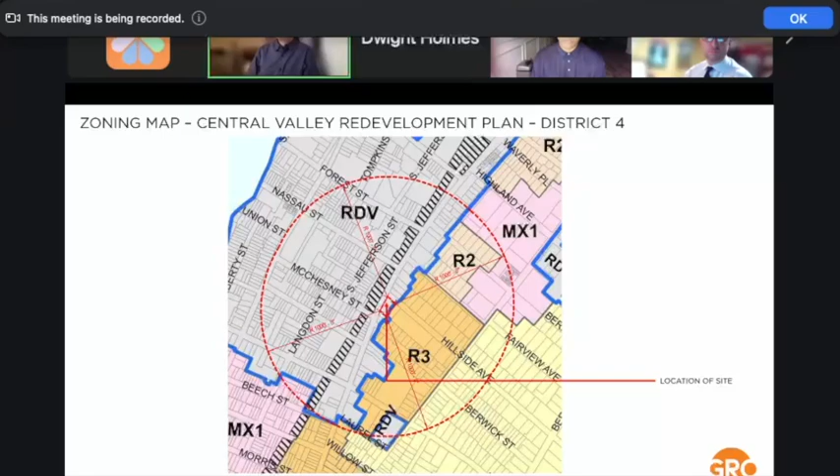To continue, the project sits in the Central Valley Redevelopment Plan District 4, with the 1,000-foot radius highlighted in red. You see it's adjacent to the R3 district, which is a somewhat more dense housing district within the City of Orange. We are also interestingly along a transit corridor, the New Jersey Transit Rail, which figures prominently into our thinking about building design and the transit-oriented suitability of the project.

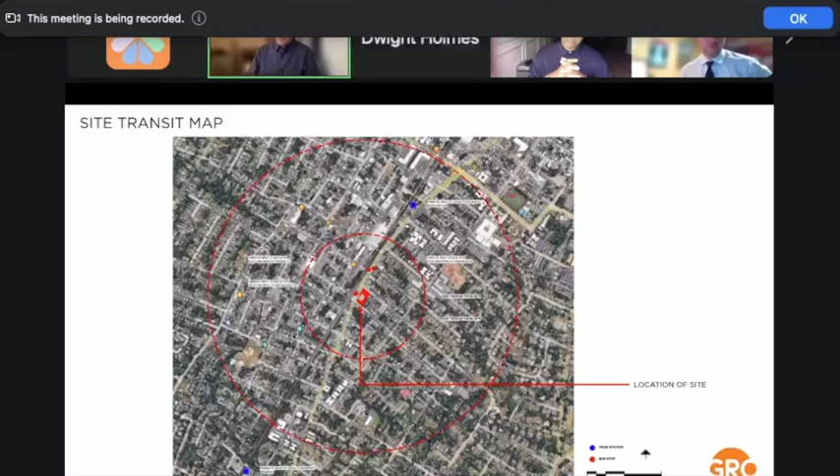It's right in the middle of 2 train stops, between a 10 and 15 minute walk - 15 minutes to the longer one to the south, and 10 minutes to the stop north of us. In addition, we have 3 bus stops, including one right across the street from us on Scotland Road. You see here the 1,000-foot and 2,500-foot radii, signaling walkability, and certainly those bus stops are within 1 and 2 minutes of walking.

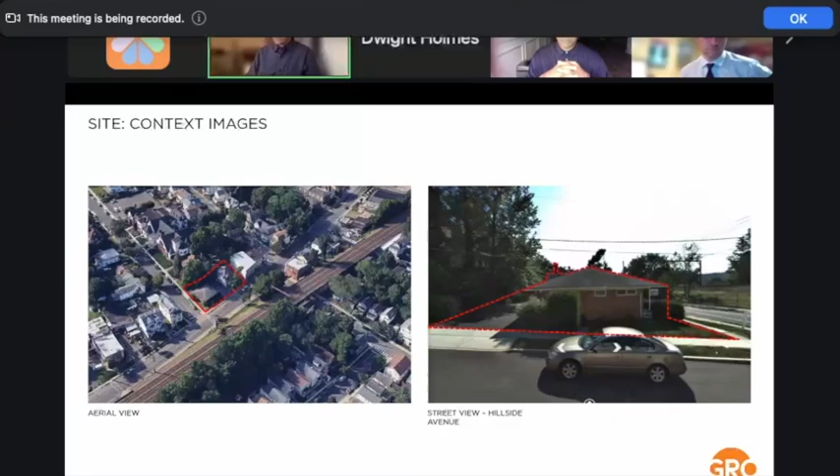The Historic Board agreed last night that the 2 houses existing on the site are non-contributing houses. One is a 1960s-style ranch used as a dental office, and the other is a slightly older house in some disrepair. You can see that house on the left image here, and then on the right image.

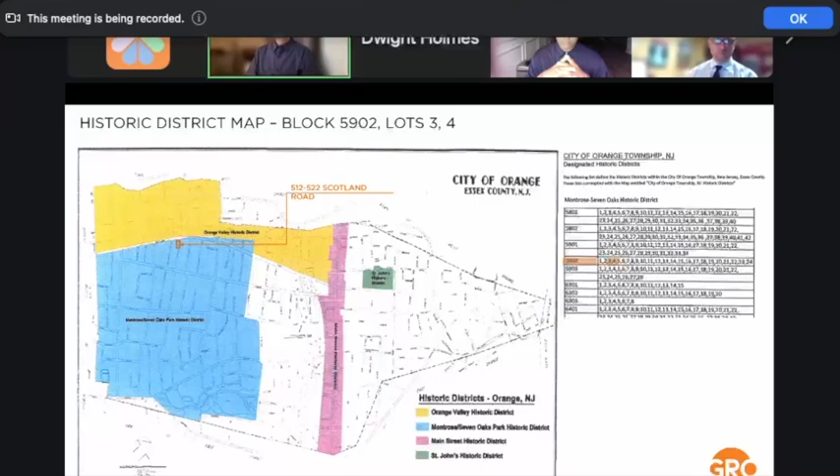We are in the Historic District - specifically the Montrose Seven Oaks Historic District. We're bordering the Orange Valley Historic District, which is on the other side of the tracks, and you can see where we sit prominently on that edge of blue.

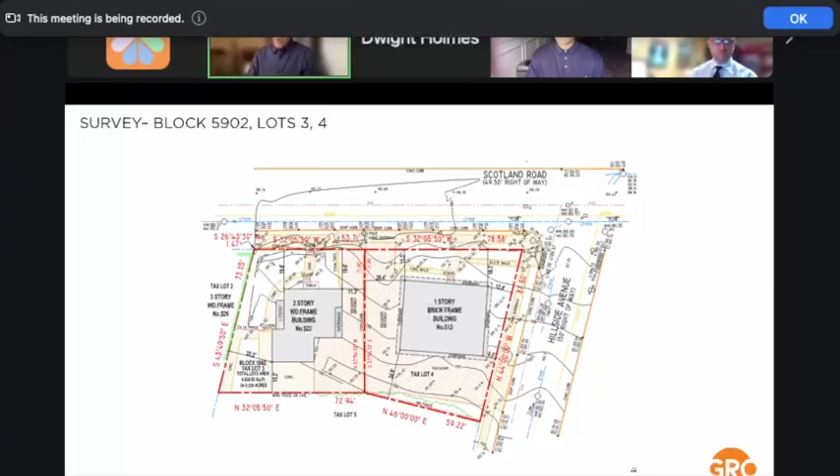We are cognizant of that in proposing an ADA accessible ramp for pedestrian entrance in the front of the building on Scotland Road, as well as a vehicular driveway and drive aisle that is coordinated with the slope of the land, which you'll see in a second.

Now, to read some information into the record, the total lot area, this is lots 3 and 4, is 9,936.02 square feet, about 0.228 acres. The gross building area proposed before you is about 39,734 square feet, slightly under 40,000 square feet.

It's a residential occupancy. We list an S occupancy for the parking garage on the ground floor. It's in the Central Valley RDP District 4. Our proposed height, which complies with the zoning, is 5 stories and 58 feet, and we're proposing 30 units.

Of the 30 units, we have 1 studio at 564 square feet, 14 one-bedrooms at 751 to 799 square feet, and 15 two-bedrooms between 1,001 and 1,049 square feet. So in terms of housing diversity, this is right down the middle, split between 1 and 2 bedrooms, with the exception of 1 studio.

And you'll see why that unit is a studio. You'll see they are healthy sized units and consistent with other projects that we've brought before the board, and still other projects that this board has approved.

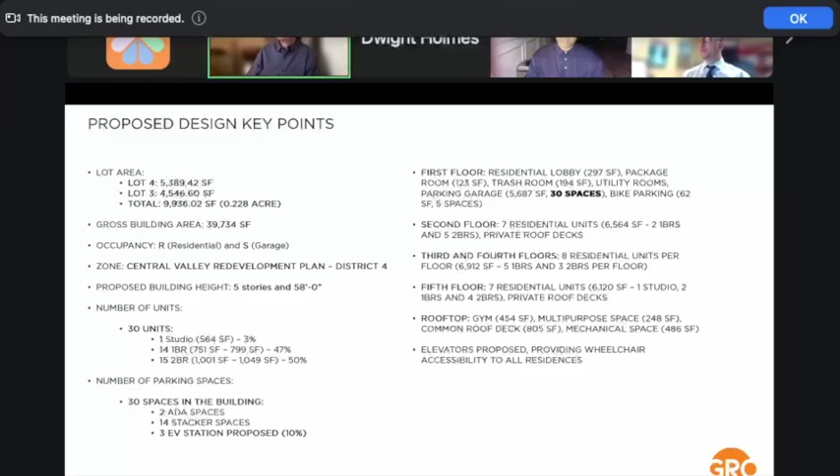You can see that we have primarily residential floors. The 2nd through 5th floor are residential. The ground floor is primarily parking, but does contain a lobby, a trash room, some utility rooms. There is a rooftop with amenities, a 454 square foot gym, a 248 square foot multi-purpose space, and just over 800 square feet of common roof deck, which we think is really great.

The buildings that are on the site are slated to be demolished. Again, that was discussed with the historic board last night. There were no issues with that. This is our site plan.

So the building is on Scotland Road on a corner with Hillside. You see Hillside Avenue is here where we have the vehicular entrance, and we coordinated the location of that curb cut with the elevations. Our main pedestrian entry to the space is here, where we have a series of steps up, because we're raising that first floor with the slope, and then that ADA accessible ramp that we built here.

We have a 5-foot setback that is greened all around the front corner, as well as a 5-foot setback against our lot line. You see we have an existing 3-story structure right on our lot line, so we're separating from that 5 feet as required. This is the rear yard, by the way, because of the corner status, so we have a side yard over here. So we have a 5-foot in the rear yard, a 5-foot in the front on the frontage on Scotland, and a 5-foot in the frontage on Hillside.

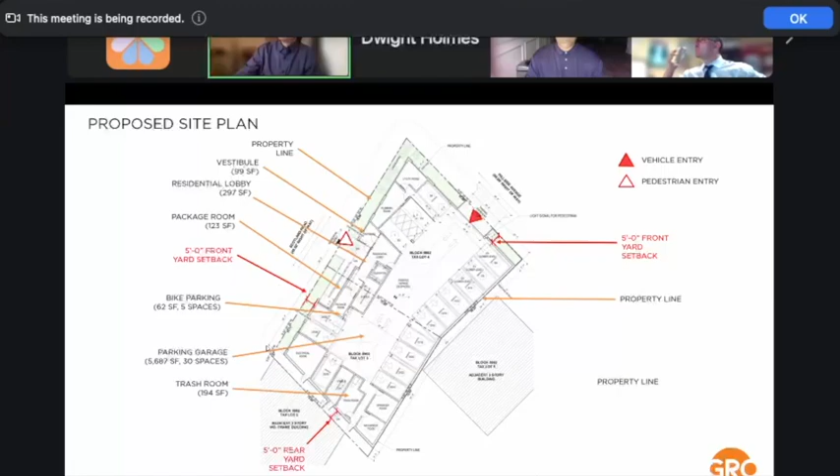You see the parking spaces and stackers, the elevator, the residential lobby here, as well as some utility and plumbing spaces. The trash room is here. There's a dedicated way out this sidewalk here to the street for collection days only.

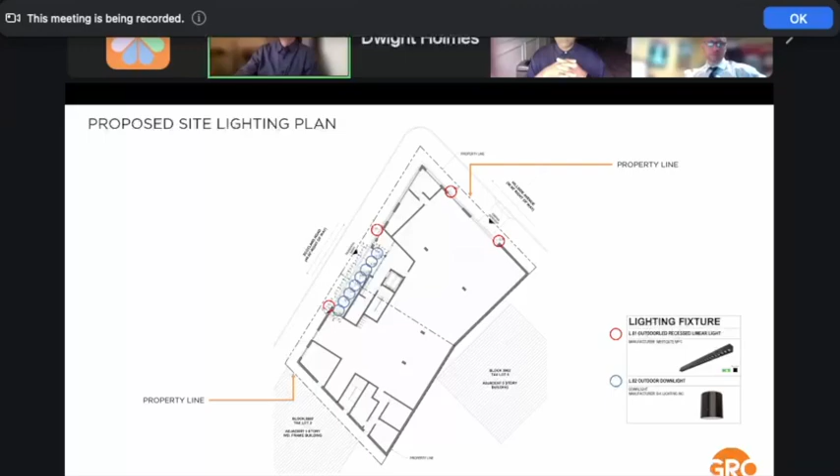We have a lighting plan. We're using fairly typical BK lighting, downlights, as well as recessed linear lighting. That recessed linear lighting is here, and then we have the downlights here. And then this is the proposed trash path that I spoke about, from the trash room out this door to Scotland. The bike path would be accessed from the garage to keep the bikes out of the main lobby.

Our first floor, talked about this already, but you see it zoomed in here. You can see we have dashed all of the car turning radii that have been worked out with our civil engineer. Electrical room on the corner, trash room is over here, sprinkler and mechanical spaces in the back, and then we have plumbing and utility here.

Our lobby is here, accessing directly that elevator and stair A. And we also have the dedicated package room, 123 square feet, that I believe will also include some cold storage, which is an amenity that we're seeing increasingly and putting into our buildings, by the way.

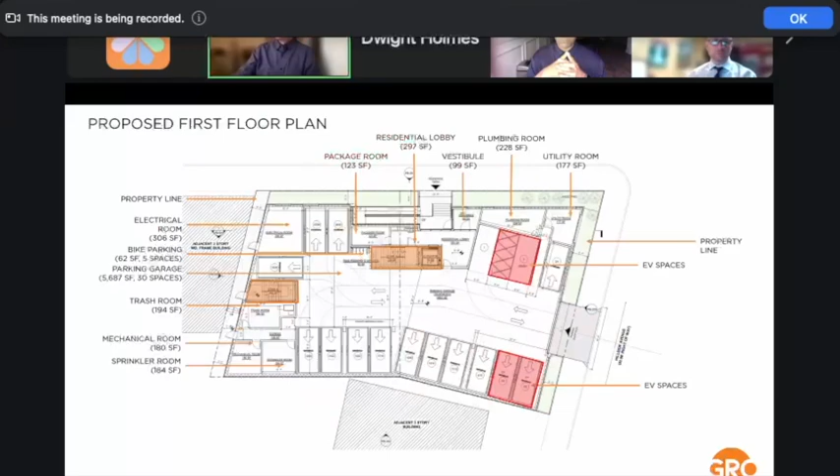So I want to go back to here. I mentioned the 5-foot setback. At the second floor, we are pulling in 6 feet 9 inches. Now that's going to figure prominently as you see the elevation, because we are undulating this facade horizontally, and you'll understand why in a moment.

Here you see the layouts of the 2 bedrooms in the tan color, the 1 bedrooms in the light pink color. So we mainly have 2 bedrooms flanking the corners here, and then the 1 bedrooms in the rear. Very straightforward and efficient double-loaded corridor with access to both stairs and the elevator, and then some roof deck areas shown in green, including this triangular wedge on the corner of Hillside and Scotland.

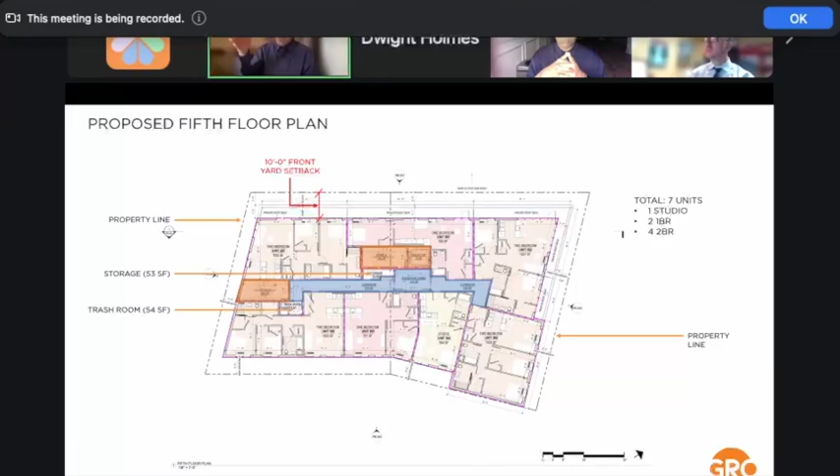As we go up, the 3rd and 4th floor step back out to that 5 feet. So if you remember, we were at 5 feet on the ground floor, then we stepped into 6'9", and then on the 3rd and 4th floor we're back out to 5 feet. And then we step back on the 5th floor to 10 feet. So we're really kind of undulating horizontally that facade, and I'll tell you why in a second.

The roof deck is here. You see that 454 square foot gym, the 248 square foot multi-purpose space, and then an 805 square foot roof deck with 2 means of egress. So the elevator and the stairs do have to go up to these tenant accessible public spaces.

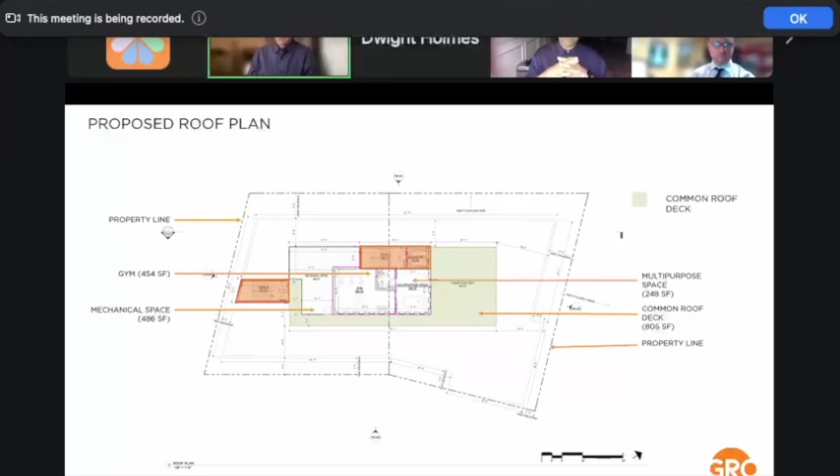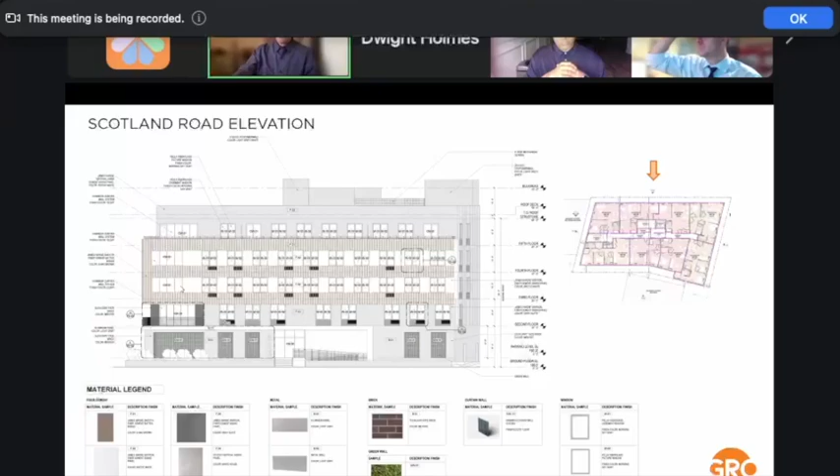Now, in terms of our facade, this is a flat drawing, right? It's a 2D drawing. I'll go through materials and then show you what this looks like shortly. We do have a brick at the base. We have a darker Hardie fiber cement slate gray color here. And then on the 3rd, 4th, and 5th floor, we have an Arctic white Hardie panel, which are the lighter colored panels, and then a batten Hardie system, which if I zoom in is really almost like a vertical slat that you see.

What I like about this view is you can see all the materials fairly clearly, in that we have that brick on the base, and we do have some living green wall proposed here as well. You can see the parking garage entry here. That portion of the facade on the 2nd floor that steps back is a slightly darker gray. And then we have that kind of Arctic white color infilling the 3rd and 4th floor, and then the roof, and then that vertical batten Hardie that you see here on both Hillside, wrapping to Scotland, which we think is quite dramatic.

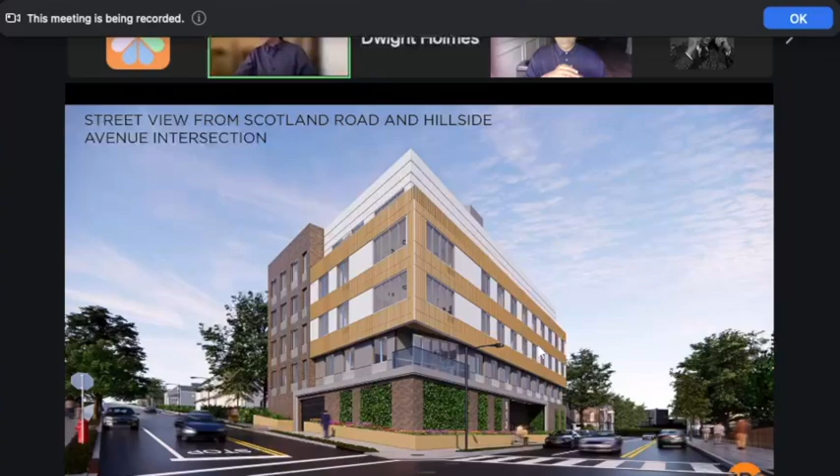These are some other renderings we have. This is a day view and a night view where you actually see that brick at the base wraps up. And so we're dealing with the depth of this site by going from a horizontal read on the front corner of Hillside and Scotland, to a more vertical read with punched windows that you see on the side here. And when I go back to those elevations, you'll see what that looks like.

So this is the front elevation. Now this is the rear - actually not the rear, this is technically a side elevation, but this is the back of the building parallel to Scotland Road. We had just proposed it as a monotone building that is actually blocked by some trees on the adjacent church site. We've updated that to have brick sort of in this L shape at the base and coming up the top.

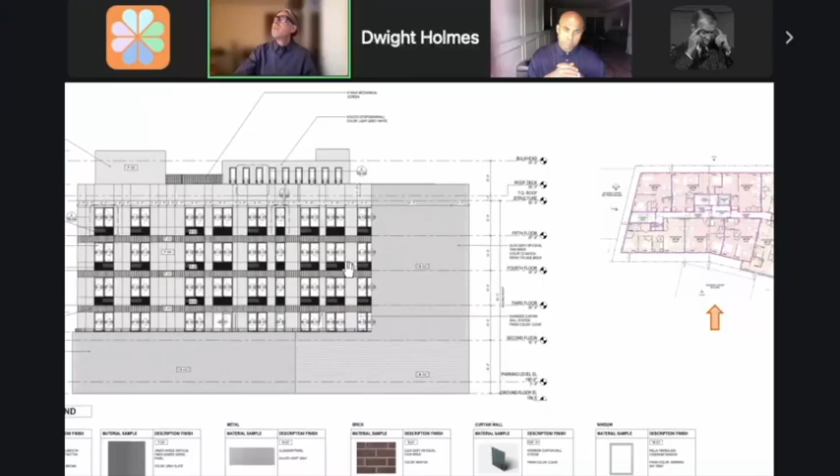So that brick that you saw in the rendering wraps, and then we've actually got that vertical batten Hardie system delineating the floors, using the system in a slightly different way, really delineating that horizontality in the rear, on this back elevation. You can see where that is with the mouse.

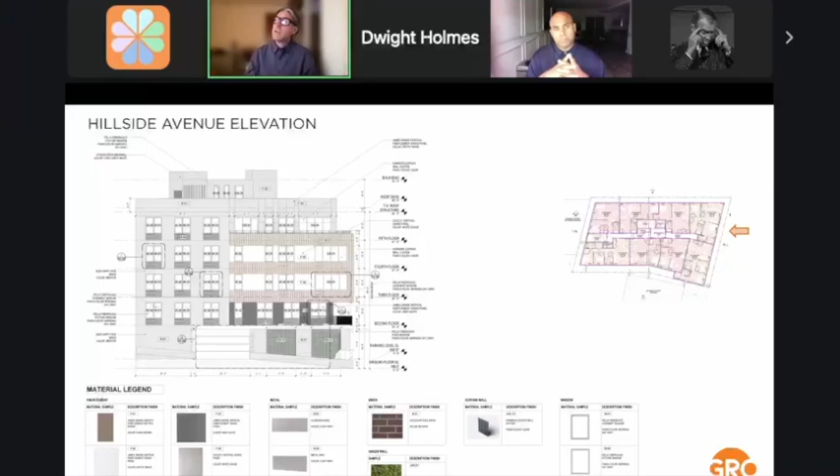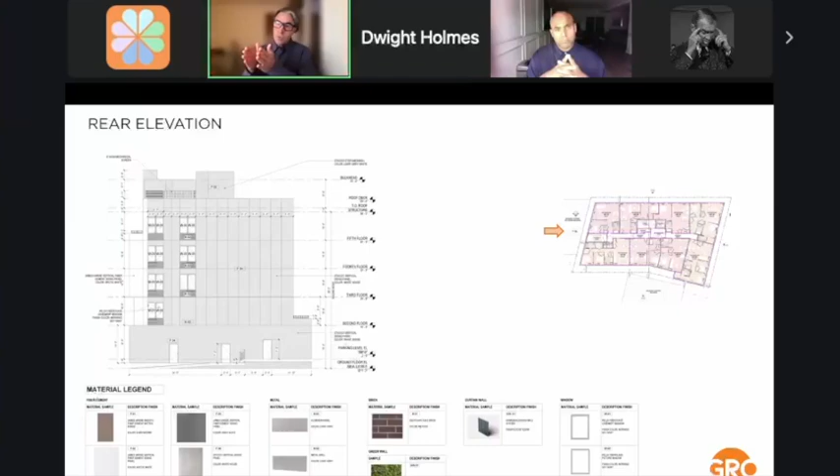The side elevations you saw in the renderings were carrying the materials around on Hillside. And then on the other side elevation, which is technically the rear, we just have stucco because we're so close to that adjacent non-conforming lot line building that I spoke about.

We've provided updated, zoomed in elevations that show some basic detailing and dimensions of windows of the Hardie batten system, which is here, as well as the green wall and the parking, as well as some patio spaces with vertical railings and so forth.

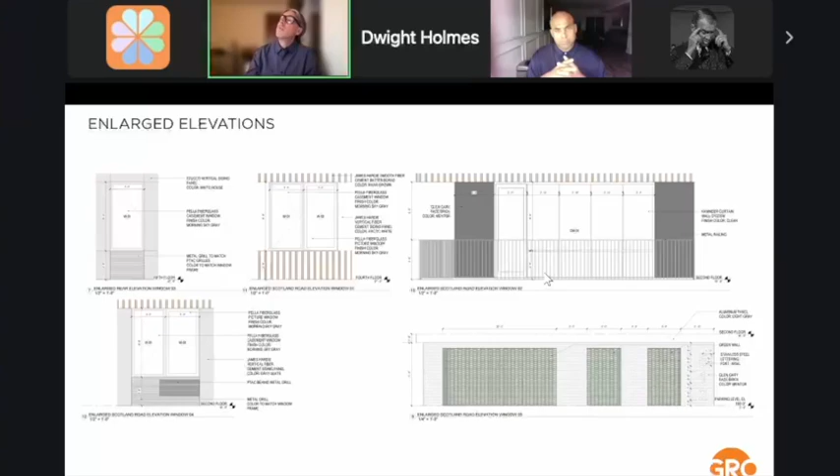And then I think I'll end with this image, which, as I said, the historic board was quite excited about. I'm excited about it too. We actually made this in anticipation for the historic board to really address the unique siting of this structure, and I hope you'll agree. Thank you.

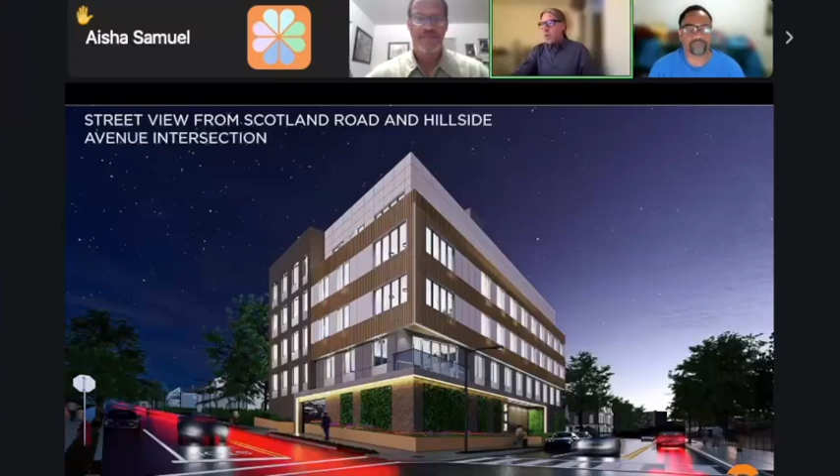That's a great question. The answer is no, and I don't have a graphic that shows this, but let me go back to the site plan. Is it recessed? It's recessed, that's right. So what's happening is if I zoom in, the whole site is here.

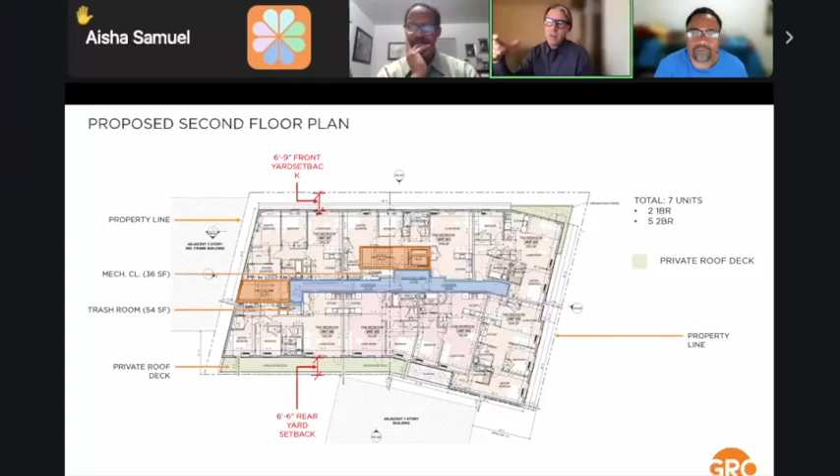We're taking a 5-foot setback, making the sidewalk depth—I think the sidewalk depth is 12. Even if it's, let's call it 10, let's err on the side of caution, we'll have 5 feet. So there's a 15-foot open aisle on both Scotland and Hillside. We then have a modest planter before we start our building. I'm not a traffic engineer, but we were cognizant of that.

What we've also done is we've actually canted, clipped the corner a little bit here to increase that view width, as you see. So I don't anticipate it being an issue. And I also don't anticipate, given the relatively small size of the project, that there's going to be a lot of activity into and out of that driveway with the 30 cars.

Okay. And I'm assuming those planters are going to be shrubbery and not trees that are going to grow up to 10 feet tall. Correct. Manicured shrubbery vegetation. Okay, thank you.

Any other questions from any other board member? Just, for my own understanding, this is a 5-story development, and a lot of the properties in that area are 3-story houses. Why did you opt for 5 stories?

I mean, obviously there's a metric that the developer wants to meet. My job as an architect is to review your as-of-right zoning, and in this case, that's set forth by the redevelopment plan that we're bound to, and look to design a building that conforms to and meets the standards and goals of the plan. And the standards and goals of this plan for this site set forth 5 stories and 58 feet. I know it is allowed, it just seems out of place with the neighboring properties, but thank you.

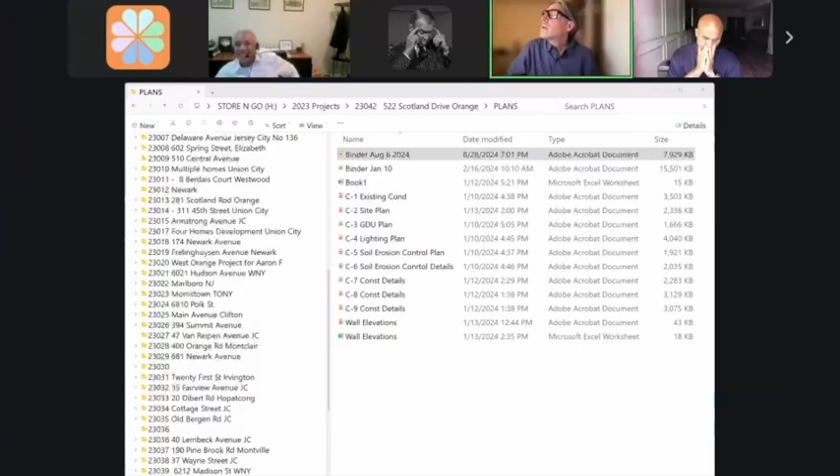Jesus Christ, I don't know why it's not coming up. So I don't have it. It seems I have, we're pulling it up, guys. Jody's gonna pull it up and share. I'm sorry, but I don't know why it's not grabbing my drawings. You can only see my file folder, right? Yes. This is very strange, never ever happened before.

Why don't you stop sharing and let's let Jody share, and then we'll move on real quick. Participants, everybody's here, look at this. Mr. Chair. Member Foston? Yeah, do they have another witness? We can move and come back to this. We're gonna wait, we're gonna be patient.

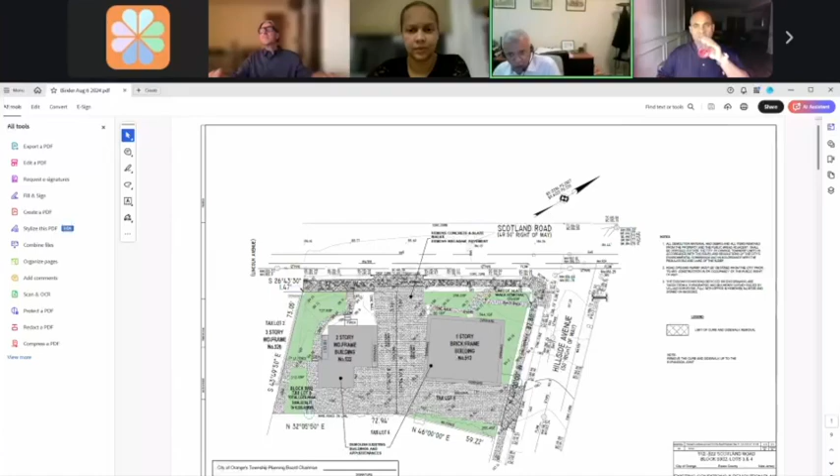Existing conditions is on the screen right now. This is the drawing that the engineer from the board had some comments on. One comment was to include a title block for the signatures of the chairman, the secretary, and the engineer to the board. I added that. There was one comment regarding the setbacks of existing buildings to the property lines. I believe Richard already took care of that on his drawings. If the engineer from the board still believes I should put it on my drawings too, it's a duplicate, but I have no problem with that.

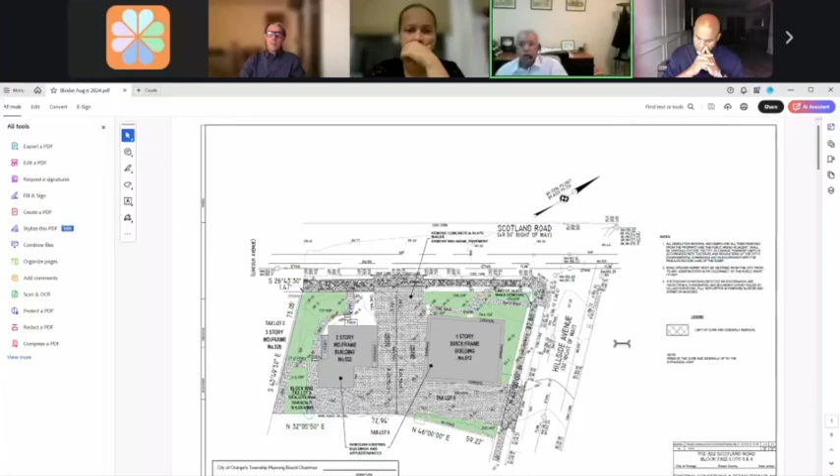I didn't want to just add things that are duplicate, but I can do that too. As you can see here, in green is what is called open space, typically grass permeable surfaces where the water can get through. We, the engineers, use that to quantify what is going through the soils and what is going into the drainage system in the street.

Going to the next drawing quickly is a site plan. You're going to see at the very bottom of all the drawings something called 811. That is a code we use for the utilities mark out before any construction starts. The contractor is by law required to call these numbers to get a mark out for all the underground utilities, so he doesn't mess up the water, electric, gas, or anything else.

So the existing conditions in here is showing. We are trying to maintain the strip of grass between the curb on the street and the sidewalk, a nice touch. We're maintaining the sidewalk at 4 feet wide, and we have an additional strip of grass between the sidewalk and the property line. After that, we have what Richard showed in his rendering, like a raised wall, not very high, I'd say between 2 and 2.5 feet high, to keep in place a very nice landscaping that we have for this project at the front and side of the building. This landscaping is kept in place with this wall, which you'll see in the next drawing, showing the elevations at the top of this wall or high curb, and where it touches the grass at the bottom.

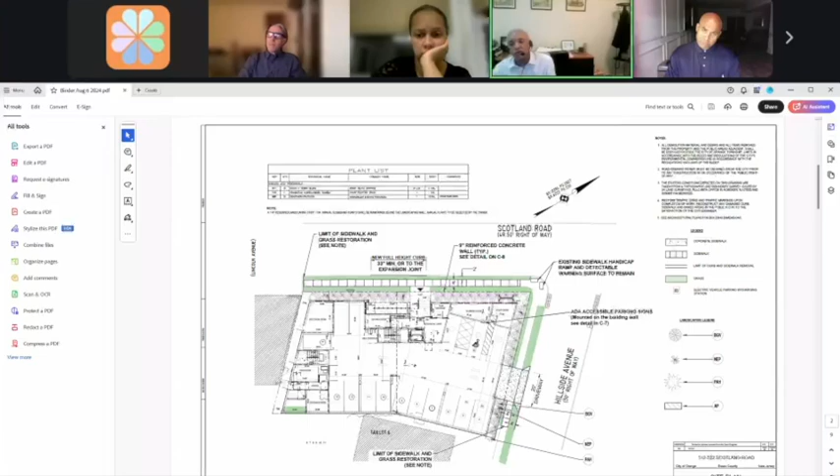Another item on the site plan is that we are maintaining, per requirement by the architect, a strip of concrete for access to the building, coming out to Scotland Road. The drawing also shows all the types of plants we're proposing for the project, and we're providing annuals in the landscaping at the front. Also because of sight distance, we're doing that because the annuals are very low rise, so it's not a problem.

I'm going to move on to the next drawing, which is the grading, drainage, and utility plan. On this drawing you'll see spot elevations all along Scotland Road and Hillside Avenue. We're defining the cross slope for the sidewalk to meet ADA standard, 2% maximum. We are not replacing the entire sidewalk on Hillside because it's in excellent condition from where the driveway starts to the intersection with Scotland Road, but the rest will be replaced. All sidewalk and curb on Scotland Road is going to be replaced. We are going to reseed, straw mulch, and put topsoil as needed as we're doing the repairs or reconstruction of the sidewalk and curb.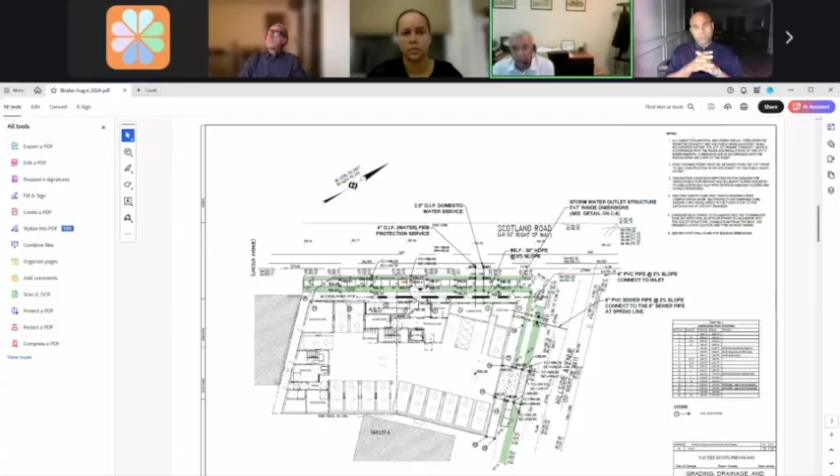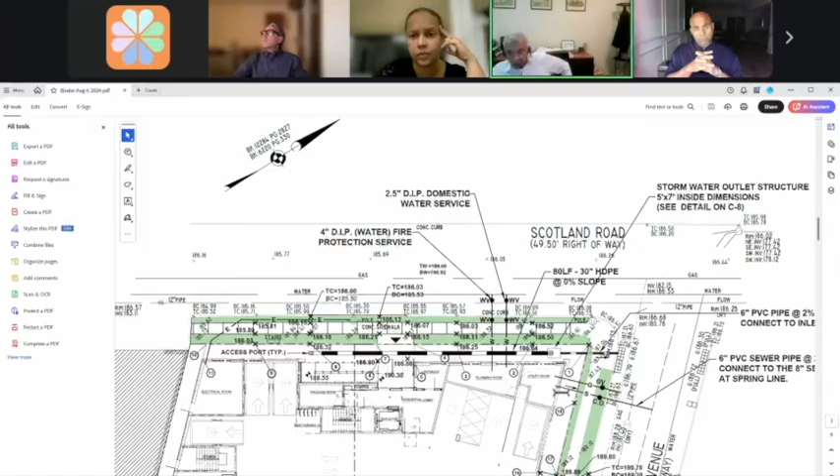One more thing about the grading, drainage, and utility plan is that we are providing a stormwater management system to collect the water from the roof that I'm going to explain later. We are going to provide a stormwater management pipe, 2.5 feet in diameter. It says 80 linear feet of 30 inches HDPE, high density polyethylene pipe, that is going to go to the outlet structure that is 5x7. From there, we're going to connect to one of the inlets at the corner with a 6 inch PVC.

The calculation for the stormwater management was already reviewed by the board engineer. Everything is very good because we are reducing the peak flows coming into these inlets.

In regards to the existing and proposed utilities, everything is already in place. We are putting new taps for the water, one for fire protection and one for the domestic water service, coming from Scotland Road. We are coming in on the side of the road where the parking lane is, so it's minimum impact to traffic on Scotland Road to install these water mains. Remember, the water is typically only 4 feet deep. We bring in the sewer and gas on the side street, Hillside Avenue. We have 6 inch PVC coming in from the building at 2% minimum slope. The pipe on Hillside is 8 inches, so we are good.

These are all the proposed conditions for this area of the project. We also have underground conduits from an existing pole going into the building, which we call a riser. It comes from the pole down to the ground and then into the building. It's typically a 3 inch rigid non-metallic conduit, and we can put up to 6 wires inside.

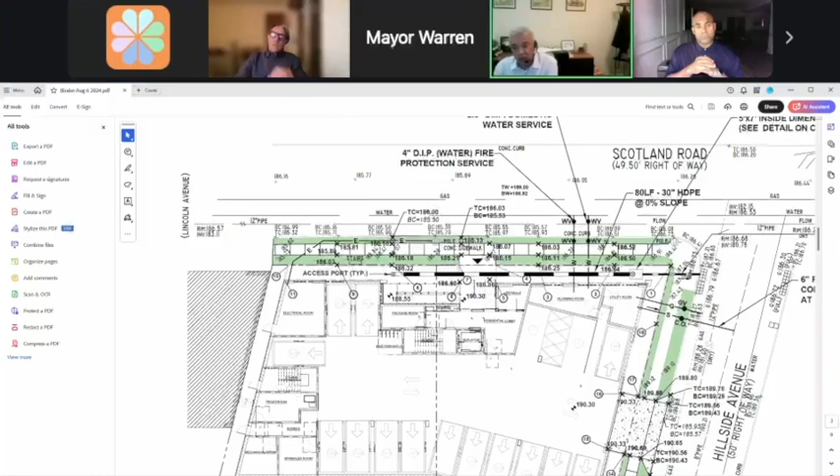Moving along to the lighting plan, Richard already showed the type of lighting in that nighttime rendering. We have a lighting strip that we're going to put in the area of the driveway along Hillside Avenue to provide lighting. As you can see on these photometrics, the different colors show the intensity of the light - purple, closest to the curb, is the least intense, and red is the highest intensity. You also have spots showing the photometrics in foot candles. This was also reviewed by the board engineer.

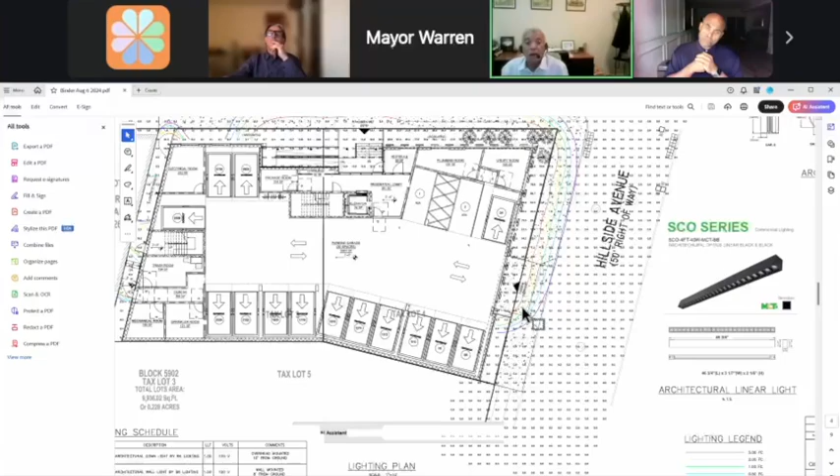We also have a soil erosion and sediment control plan. It's typical to submit these projects to the Hudson Essex Passaic Soil Conservation District for review.

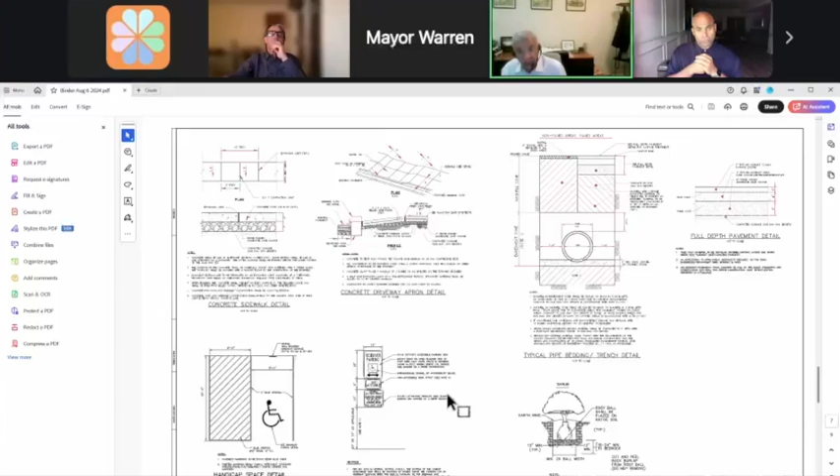And then we have all the details. In these details, we address comments from the engineer regarding the handicap space detail, which shows the cross hatching, the painting, the symbol for the handicap, and the sign for the handicap - all that is there. We also have the concrete wall detail explaining how the wall is going to be built, and the outlet structure detail, which is the structure for the stormwater management.

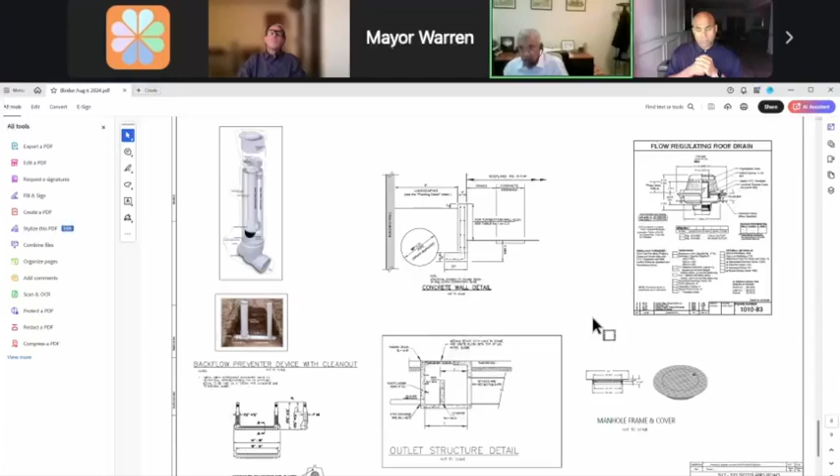We also have the detail of the flow regulating drain that we're going to have in the roof. This is for the blue roof, shown in the next drawing. One of the things we've been doing in the last 3 or 4 years is incorporating into building roofs either a blue roof or a green roof to control the stormwater into the drainage system so we can reduce the peak flow.

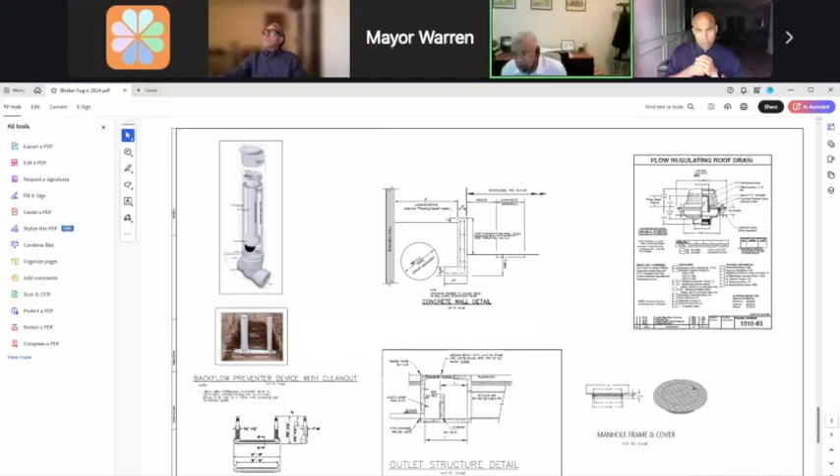Going back to the previous drawing, let me zoom in - this drain detail shows a half circle here because it's cut, showing there is an orifice in a riser inside the drain. That orifice, by the NJDEP rule for stormwater management, cannot be less than 2.5 inches in diameter. So we have a 2.5 inch diameter orifice in this drain to control the flow going into the street.

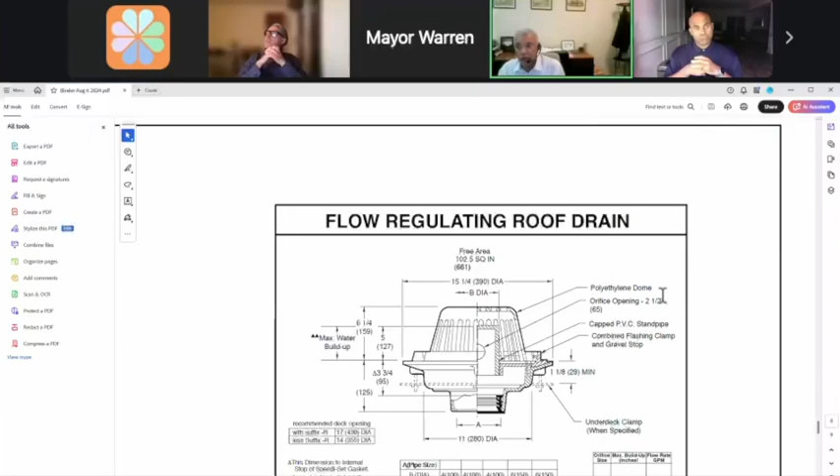In addition to that, we have the regular roof here. And that roof, whatever is shown in white, is going into a stormwater tank, and it's controlled by that outlet structure shown on this drawing.

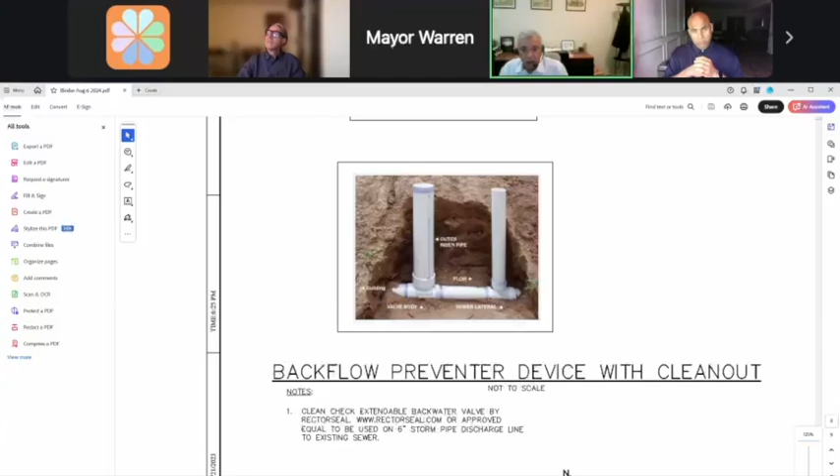Okay, so we have a weir and an orifice again, a 2.5 inch orifice, and the 30 inch pipe. The water is controlled by this orifice, and all these calculations are provided in the stormwater management report that was submitted for review to the engineer.

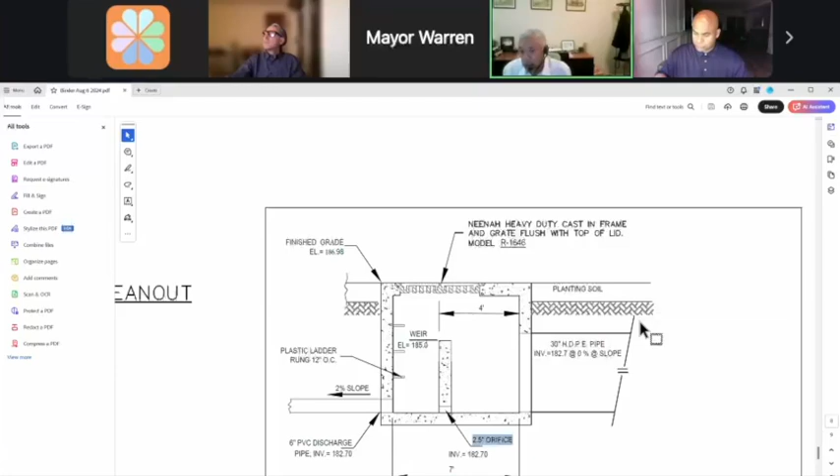And this is basically my presentation. 9 drawings. Let's mark the 9 drawings as Applicant's A2, which is a set of 9 drawings that we will provide again to the board secretary tomorrow. And I guess the drawings are titled...

What's the cover sheet say? It's 512, 522 Scotland Road, block and lot numbers. That's it. That's what we typically put on civil engineering drawings, the address and the block and lot number, so there is no confusion.

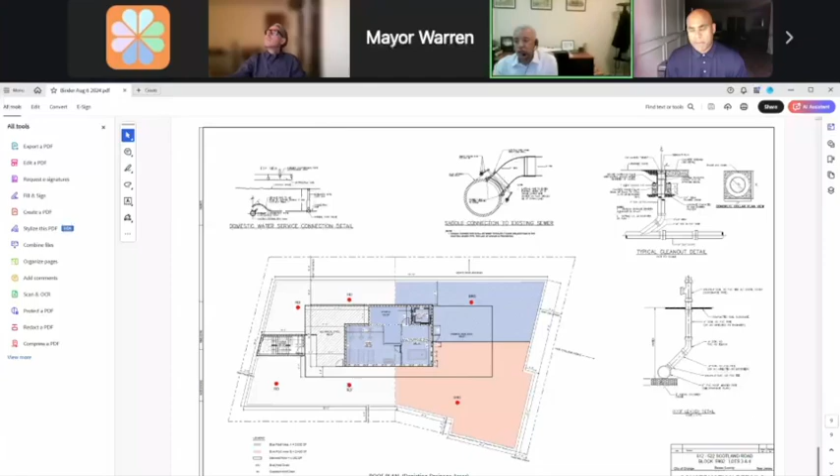What's the date of that? There is a revision date on most of the drawings based on comments from the engineer, so I can give you the date right now. I think it's on, let me look at C3 or C4. Yeah, it's 8/8/2024. Thank you. You're so welcome. We will provide you with a set of 9-page drawings from the civil engineer dated 8/8/2024.

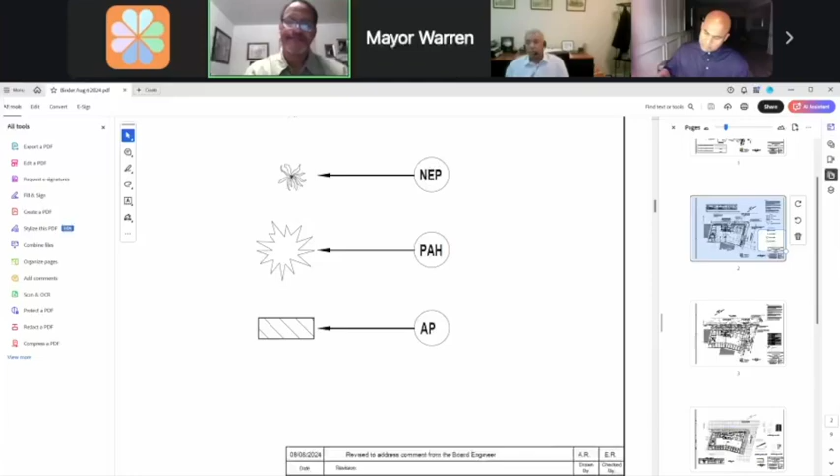Mr. Chairman, I have no further questions for this witness. All right, and I will open up to any board member that has any question for Mr. Raymond. Any questions from any board members? All right, seeing none. Thank you, sir. You're welcome. Mr. Chairman, I have no further witnesses for this application.

Okay, then we can open up to our board professionals. And since it's fresh, I'm going to ask Ms. Callahan if you could speak to some of the things that Mr. Ramon was speaking to and address any other items. Can you raise your right hand? Do you swear or affirm to tell the truth for this planning board tonight? I do. Okay, go ahead, Ms. Callahan.

Good evening, everyone. Yes, as the applicant's professionals noted, they did receive my report dated July 30th, 2024, and in their revisions and the exhibits presented tonight, they did address a great number of the items.

One piece in particular, and I can ask either Mr. Garber or Mr. Ramon, whoever's more comfortable with this, mentioned now the inclusion of, I believe, triple stack parking. Is the intent for that to be 3 spaces for 3 vehicles or 3 spaces for 2 vehicles?

No, it's not meant to be 3 spaces. It's 2 spaces. But when we say 3 position, it means that the stacker, if you can see my hands, to get the top car down, the whole system moves down into a pit so the top car can be pulled out. So it's a 2-car stacker that actually has 3 positions: a below surface position, an at surface position, and an above surface position. And that allows the stackers to be operated just by the car owner or the car leaser.

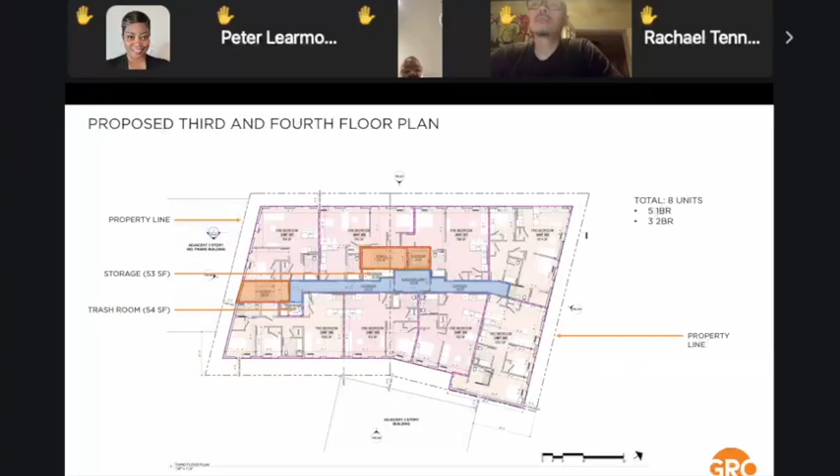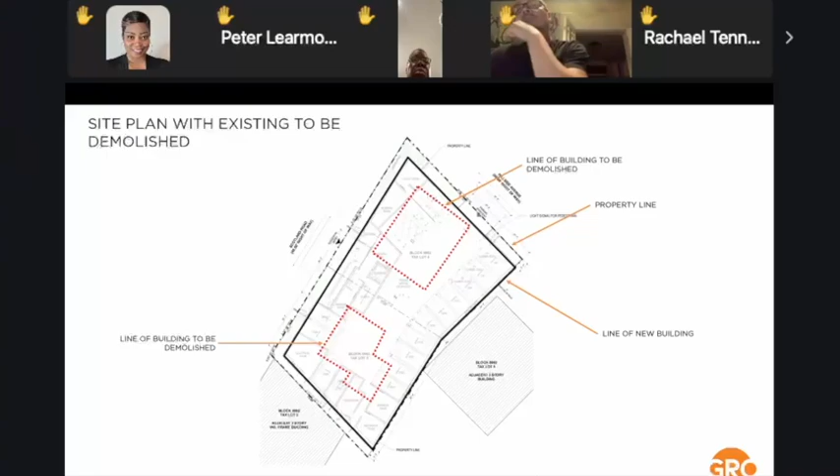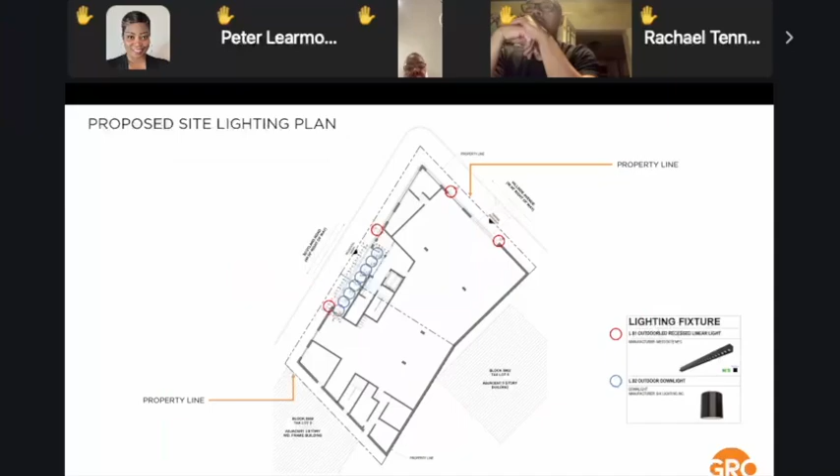Okay, so there's a couple of questions, let me unpack that. First, I'm going to show the zoning tabulation chart... I don't have the zoning tabulation chart in this presentation for some reason, but that's fine. So it is zero on the side, right?

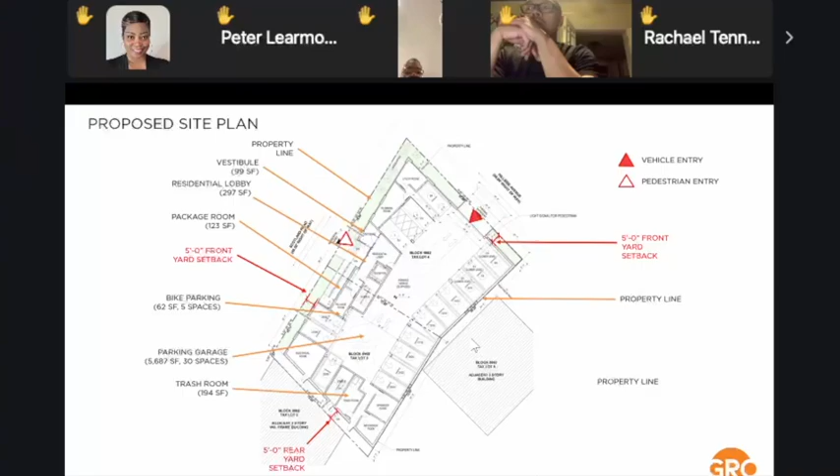As I said before, this is a front yard, just to understand what we're talking about. This is a front yard on Hillside. This is a front yard on Scotland. This is a side yard on Hillside. And this is a rear yard, how many feet on Hillside? How many feet, ma'am, are the side yard on Scotland?

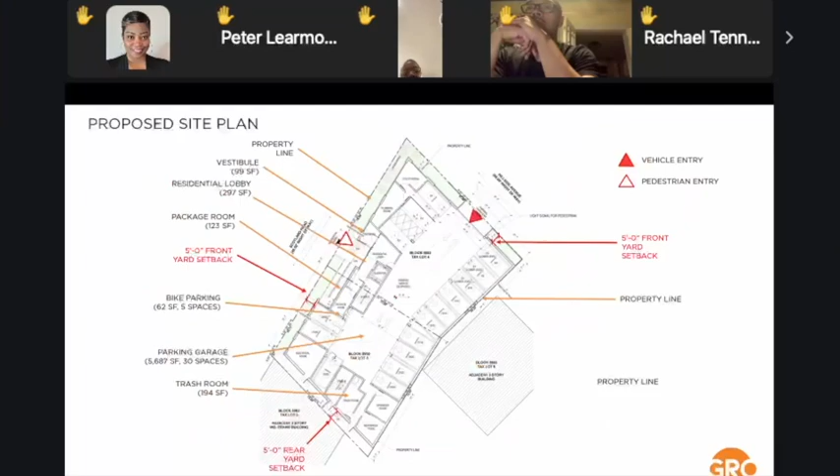I'm getting to that, okay? We are at zero on our lot line per the allowable bulk standards, okay? But when we go up to the adjacent floors, you see, okay, I'm going to advance the slide so I want you

to see this. Here's the building, here's our lot line on the ground floor. And when I advance it, you see that we have a 6'6" setback from that lot line that carries around, and then we are at zero here.

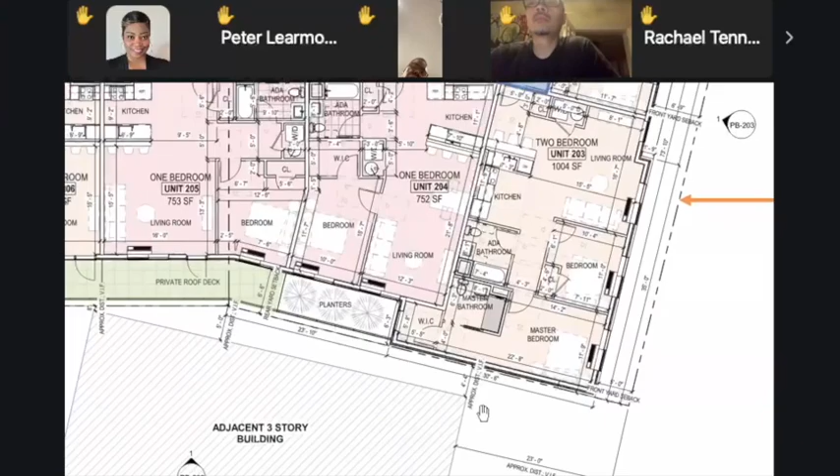And I do have a dimension, which we are showing at approximately 4 feet 4 at the corner and 5 feet at the kink, call it, right? And those are voluntary setbacks that we're doing where we're pulling our building in to give that building, which again is somewhat awkwardly sited given the shape of our lot.

And by doing so, from a building code point of view, and I don't know if you're asking this or not, from a building code point of view, we are not jeopardizing any legal light and air for either the existing building, which is sited in a non-conforming way, I would say, nor our proposed building here.

Okay, my other question then is, why wasn't a traffic study conducted, and if there will be one before this proposal is approved? I really need to see this, because you presented a proposal to the Historic Commission back in May, and not you, I'm not saying you, but the proposal was presented from your process. And they had described a 30-unit

building. But when you actually looked at the amount of units that were planned, it totaled to 36. So I would just like to see the description of the units that you currently have in this proposal. So I have two questions: traffic study and the current list of proposals.

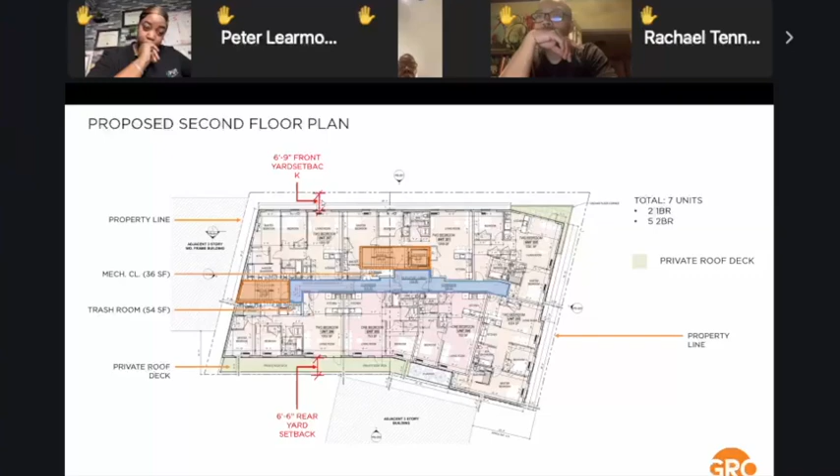Yeah, and you can see that, if I may, here. I testified to this prior, that we're maintaining at the first floor a dedicated 5-foot setback. And the sidewalk, I don't have a dimension, but I think it's about 12 feet in my estimate. What I suggested on the record before is if we conservatively say it's 10 feet, 10 plus 5 is 15 feet, which is a fairly large distance, about the width of almost 2 cars in terms of that sight line. So we're not anticipating any issues with that.